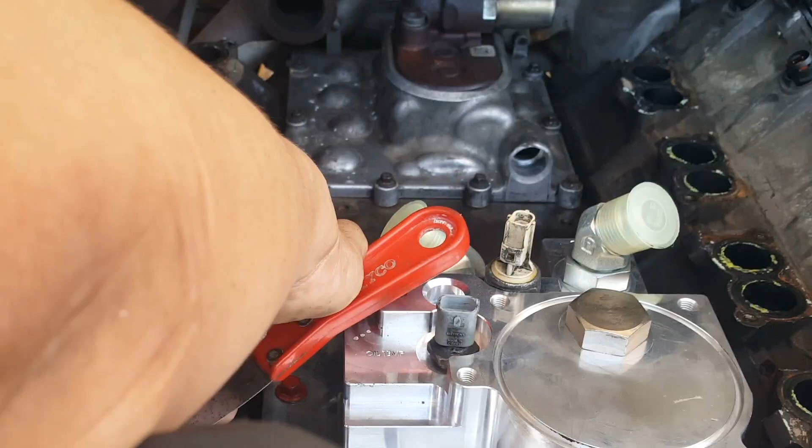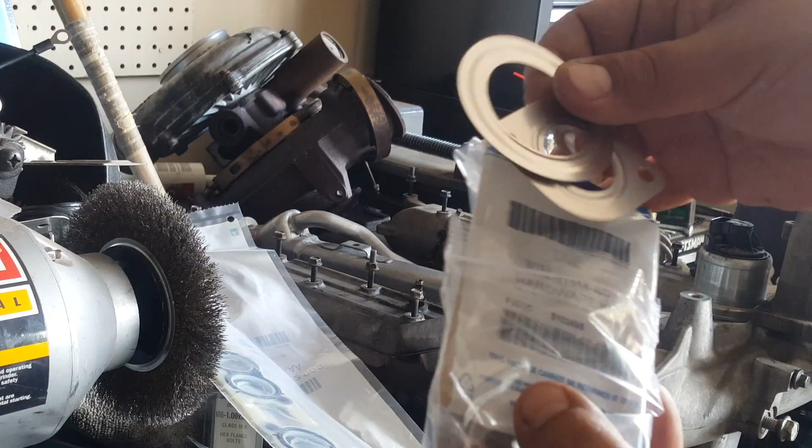Okay, now I'll work on the intake and install the EGR cooler to the intake. The kit comes with new gaskets. You could use the old ones, but if the kit comes with new ones, might as well use them. And a whole bunch of these little aluminum or tin gaskets for the EGR.

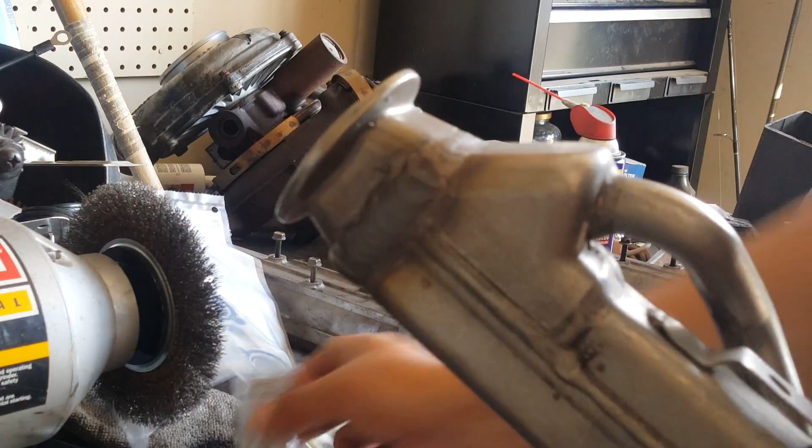My cooler was missing what I think is like a little nut down here that slips on. I'm actually using these M6 bolts instead. Got them at AutoZone, I think for under $3.

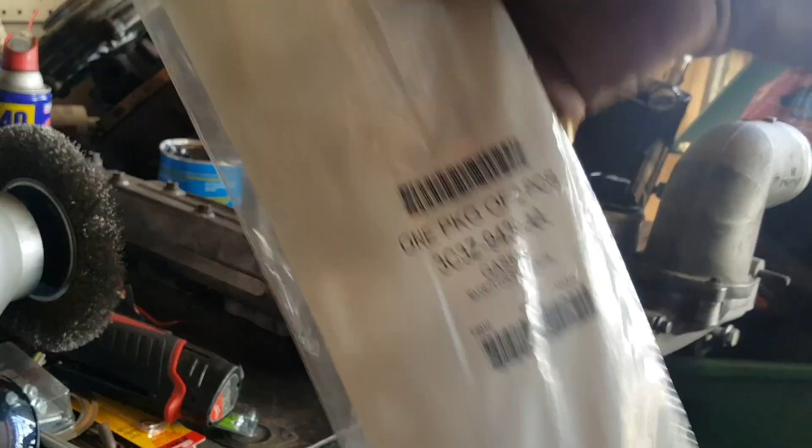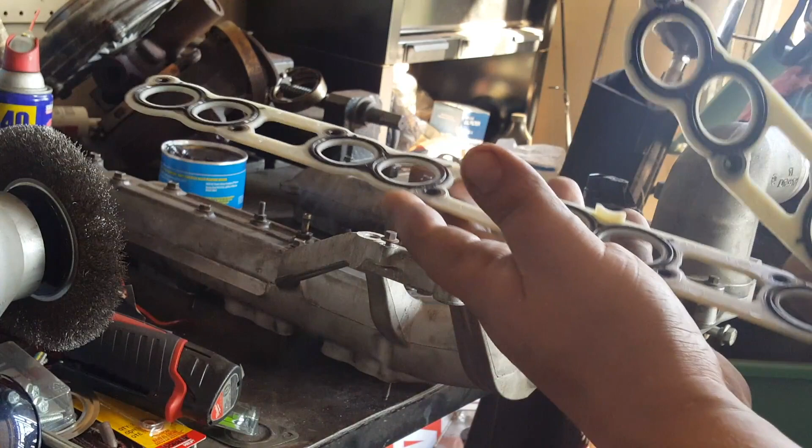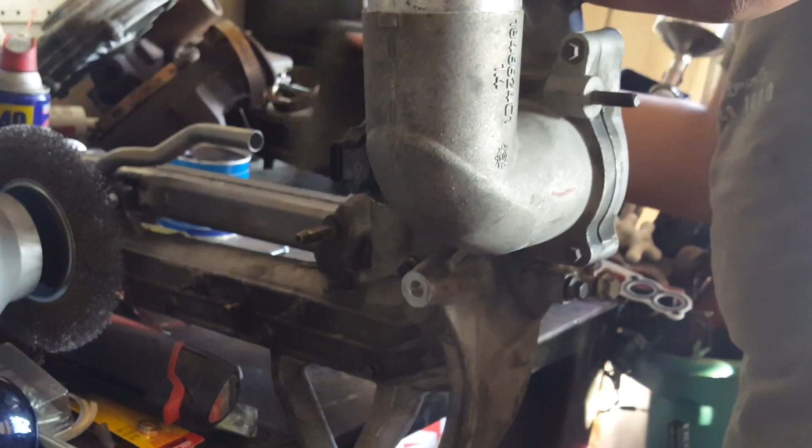Has these tabs on them. These go towards your intake, be it like this or like this, but it goes towards the intake, not towards the block. This tab goes towards the inside of the intake. Again, the tab goes towards the inside of the engine V.

Okay, we're ready for installation. Don't forget that the other side of the EGR cooler will also have this little metal tin gasket enclosed by your clamp.

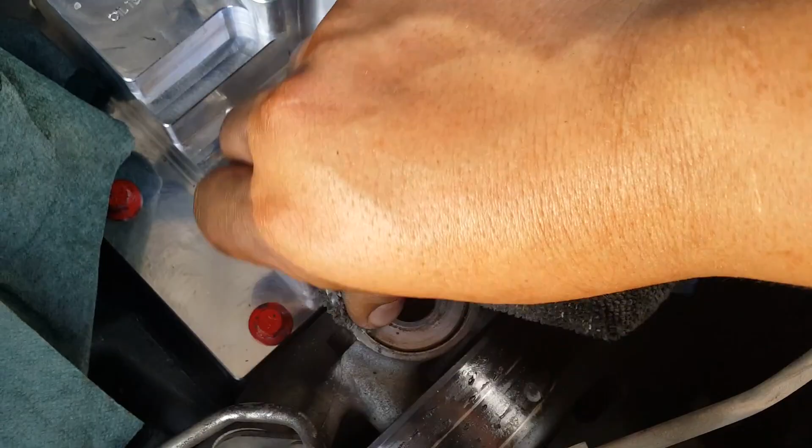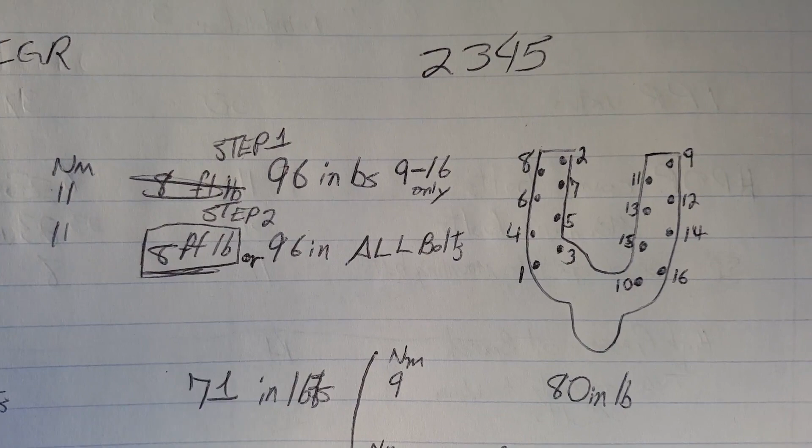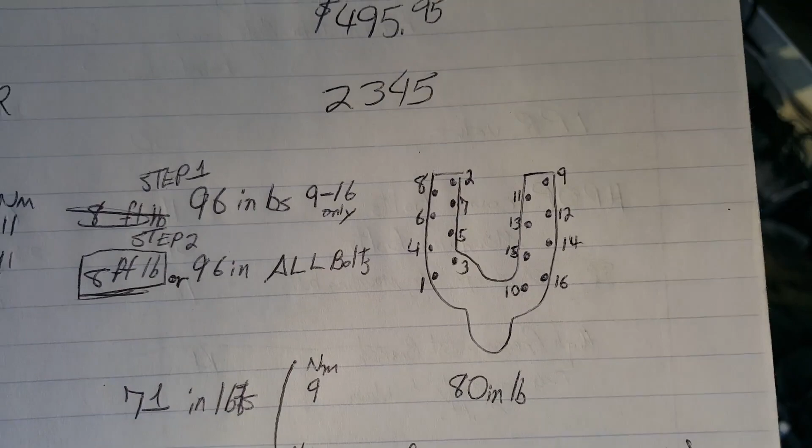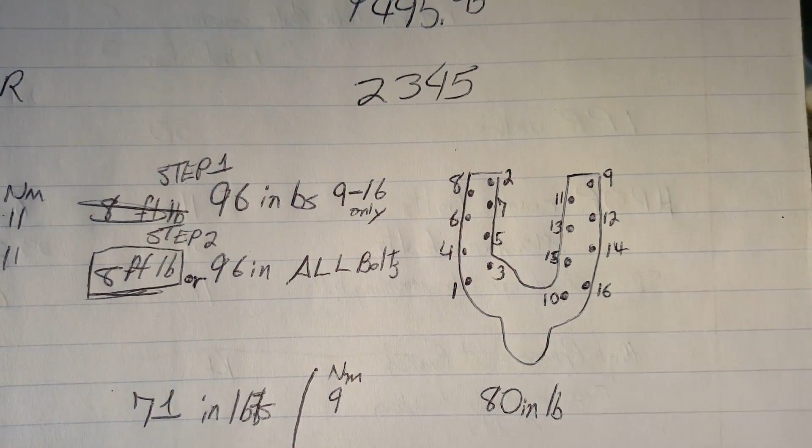This is what I'm going to use. This method is a combination of the manual, the tech manual online, and the Haynes manual. The numbering system refers to the bolts on the intake, and basically it's a two-step process. First you hand tighten all of them in the sequence that it's supposed to be. Then, like it says there, the first step is 96 inch-pounds, 9 to 16, which is basically the driver's side only. And then 96 inch-pounds, all bolts, 1 through 16.

Okay, some of the things I did while off camera, because it decided to overheat, was torque down all the intake bolts. Make sure you don't pinch this line right here, the one you have to bolt down. It goes down here, so just make sure it doesn't get pinched in the way. I lowered this back because, I don't know if you remember, we bent it to take the intake out. Let's proceed before this thing decides to overheat again.

Adding a little lube so you can slide in. Definitely, I think it would be easier if you actually install the EGR with the rubber hose provided.

Make sure you adjust the V-clamp while installing it. It seems to have gotten pinched between the high pressure oil pump housing and the EGR cooler, so I'll see how I can fix it.

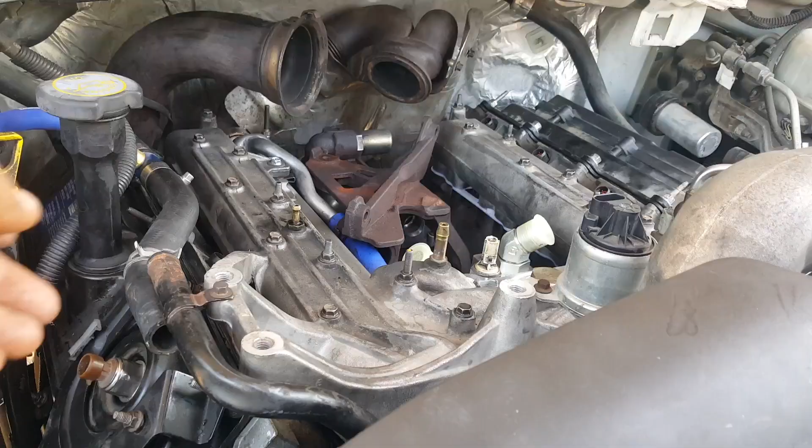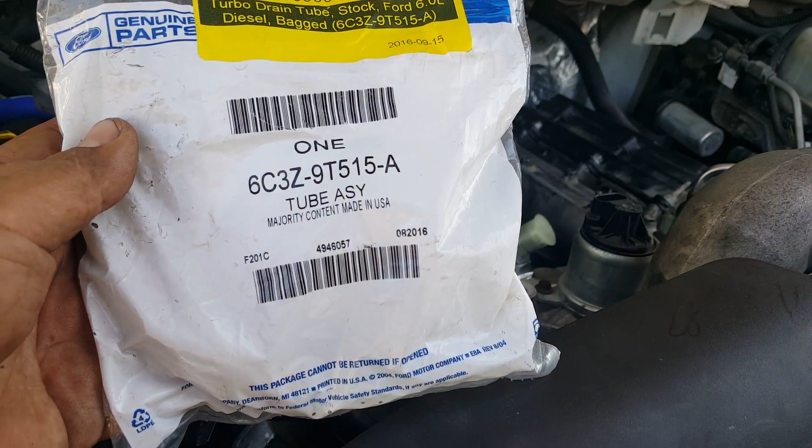I ordered a new drain back tube from the turbo. It comes with 2 O-rings. One's for there, the other one's for this side.

On the instructions, it says to measure from that little lip that you see right there, that lip to the edge. In my case, it is 23 millimeters, or about 7/8 or 15/16.

Anyways, I don't think it's necessary, but the instructions say so, so for some reason I have to do it. Reason being, if you go in and then you pull out, there's a chance that you might tear the O-rings. So anyways, there it is. I marked it, dabbed some oil on the ends. That one's easy. Alright, there it is. Now to bring back the turbo.

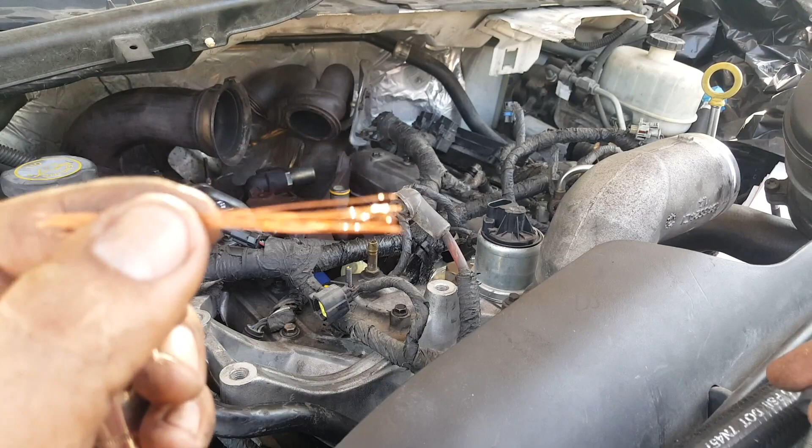If you remember, the last valve cover bolt on the driver's side had wasted threads, so I'm going to try putting some very fine strands of copper, just basic wiring, into the bolt hole. Hopefully the bolt will actually grab onto that, because it's very tight to tap and die a new Heli-Coil in there.

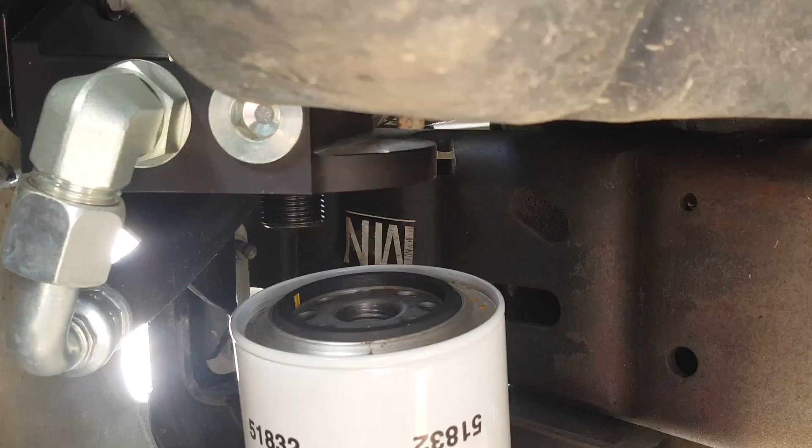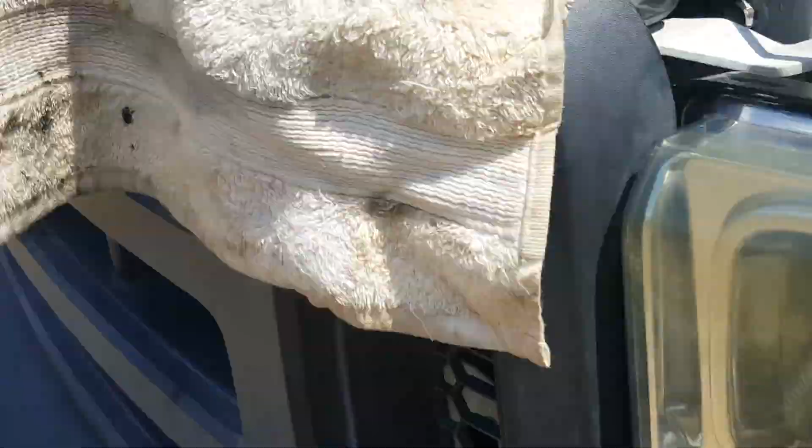Now for the important part, we need to prime this system before actually running anything. It's best if you have somebody to tell you when oil starts coming out of that side while you fill it up from, I think it's hose 3, which is the one on the passenger side.

Notice how the path is right there through where the AC lines go in, under the battery tray, under the AC lines again, up and over, and that'll give you the correct position to that outlet—I believe, no, inlet.

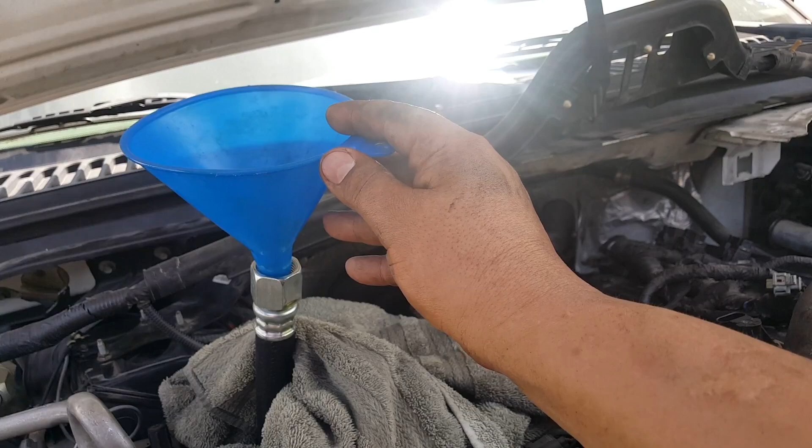Okay, once you got that, fill up the filter, screw it back on.

So the priming of the oil cooler, the radiator part or the cooler plus the filter, it's about a good three quarts of oil.

I don't know how much it would have been if I hadn't dropped so much at the beginning. Maybe get a smaller container, like a quart, and start pouring that, because the gallon is too much to pour a little at a time.

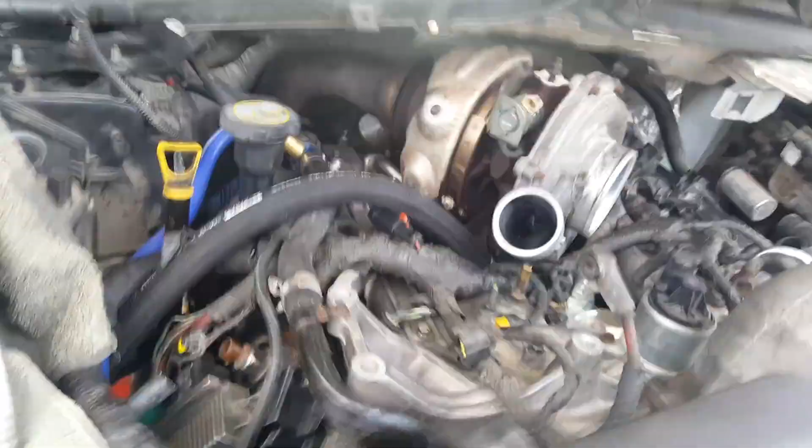Make sure the drain back aligns so it can snap on.

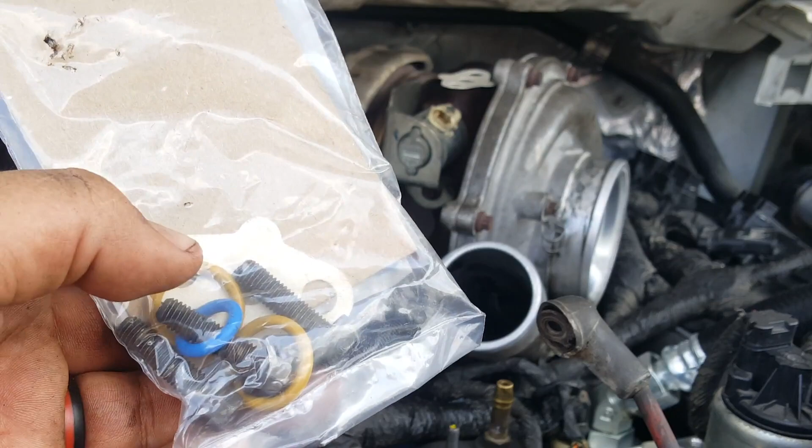The kit comes with, I believe, 3 bolts for your turbo, the gasket, the 2 seals that go on the drain back on the turbo drain, and another screw that goes to mounting the turbo oil line.

So let's replace this one.

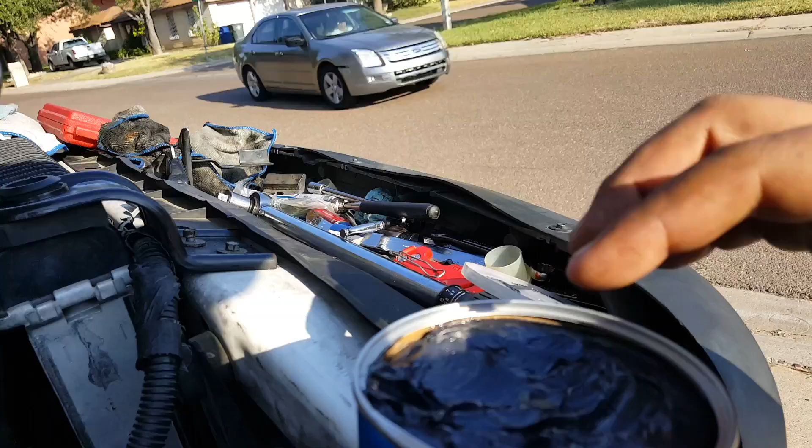I already screwed up one of these, so I'm going to use grease this time. I used engine oil on the other one and that didn't work, I guess. I kind of pinched it because it wasn't going in straight—it was going at an angle and kind of pinched it and ruined it. It cost me $5.

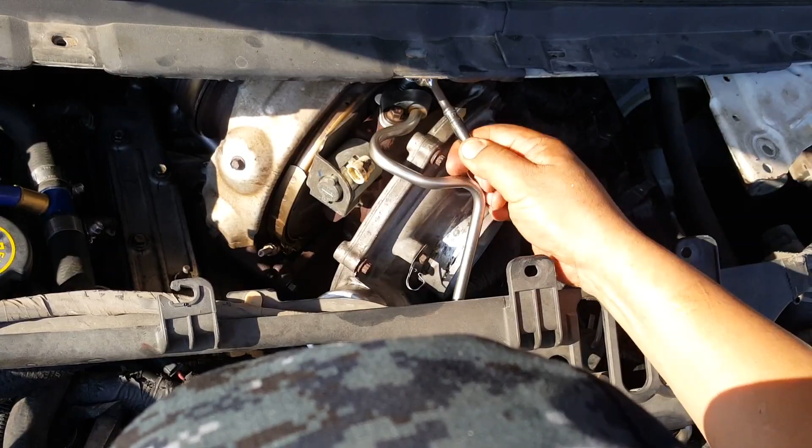Important lesson: don't use that bolt to screw down the turbo oil pipe. Otherwise the oil supply gasket might pinch, which it did in my case, and it'll break.

Your oil filter housing has a gasket that is supposed to be reused in this oil cooler. I didn't know that at the beginning, so I actually cut it just to make sure I wouldn't confuse it, but the kit does not include it, so I had to buy one. It's approximately $8.

I don't know if it really needs it since it's just for decorative purposes, but I don't want it wobbling around, so I guess that's why I'm going to install it.

Make sure to push it in all the way so it doesn't slip out.

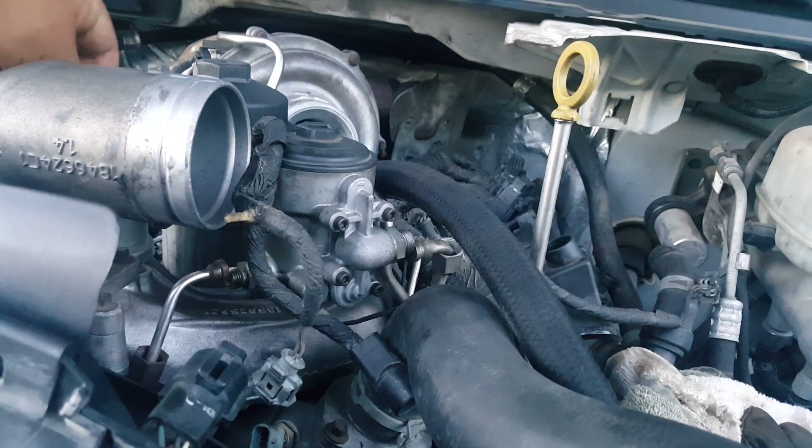Snap that into place. This goes back there. It's gonna go there, it's gonna go there.

This is the one they call the Banjo Bolt, and I believe the copper washers need to be replaced whenever you mess with it.

The banjo bolt goes on here. It has a copper washer on each side of that part right there. It says it has to be replaced every time you mess with it. These are the parts, they come now with a little rubber gasket around them.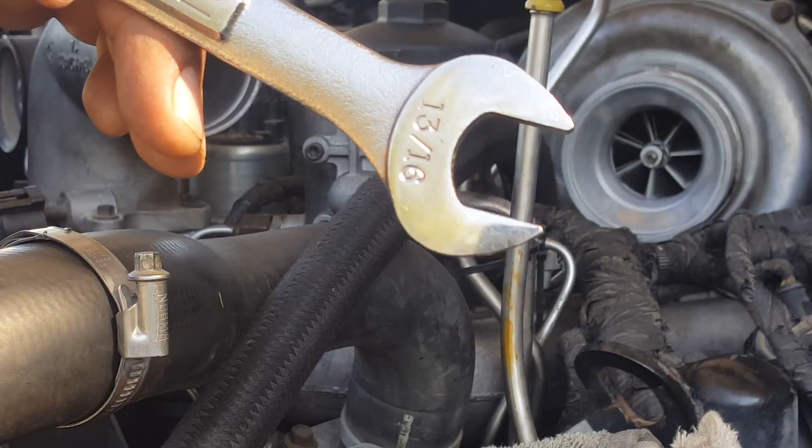It's 11/16, also for the one in back. 13/16. And a 3/4 for the banjo bolt.

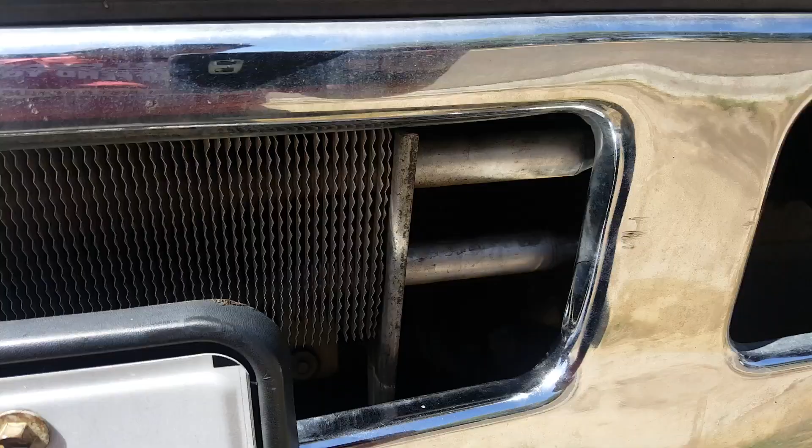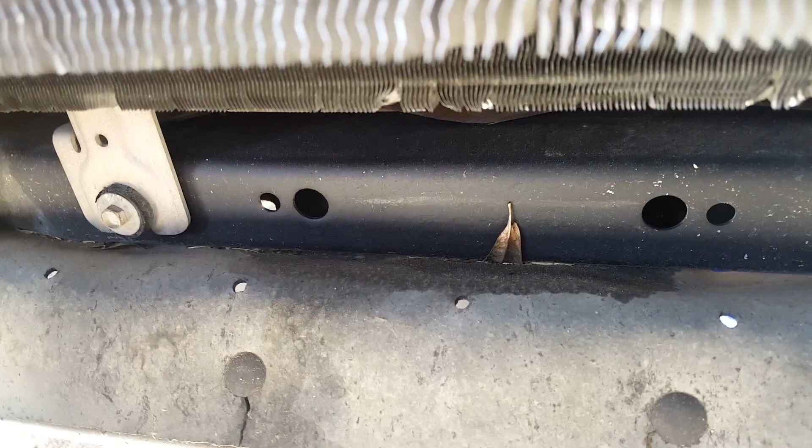To relocate the power steering cooler, I am going to probably fabricate some sort of bracket with flat bar that'll somehow screw into maybe the existing holes. Find a way where I can actually stick it out to where it can bolt on to the existing brackets of the cooler. Probably some flat bar, somehow, maybe even just weld it to the frame, but make it go out flat so I can bolt it down in case I need to service it. Just don't plan to. We'll see how that goes.

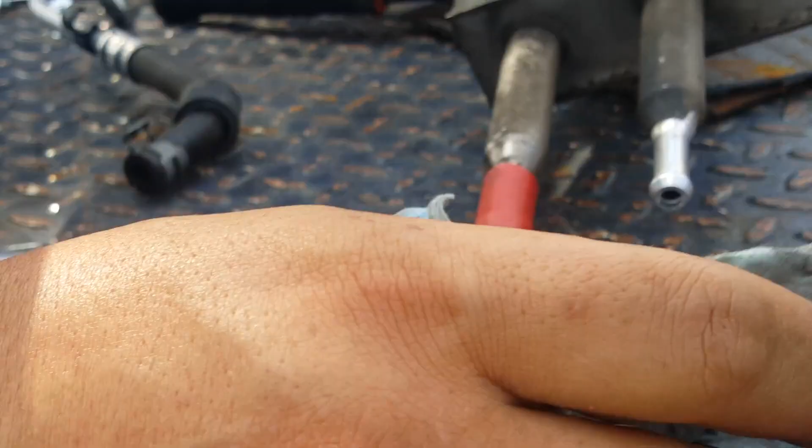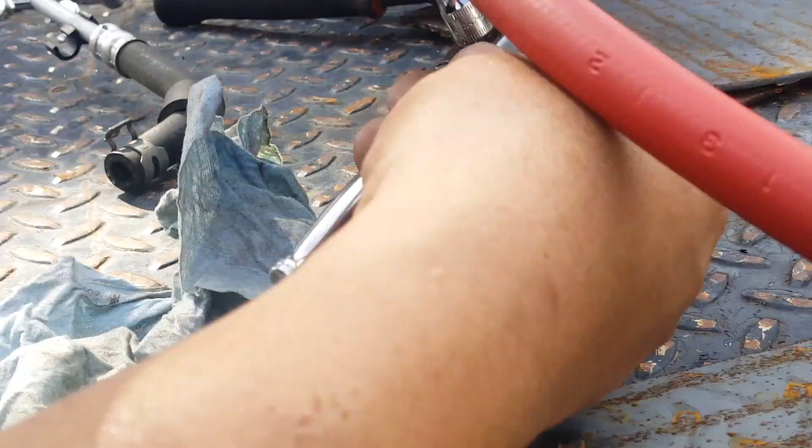With a new bracket installed, hopefully the cooler will fit right here in this hollowed out space. If you want to take off the bumper to make this easier, I guess you can. I was able to install the bracket and the cooler through this little hole right here in between the bumper. Came out all right, I just had to bend it a little bit to keep it off of the AC condenser. But other than that, it looks like it's gonna work great.

Right now I just have to hook up this hose and it should be good to go. Just like that, there are the two lines, the homemade bracket. And it should look good. This is kind of important because if it's anything like my 7.3, the brakes depend on your power steering, the Hydro-Boost.

Now that our lines are connected down there, I can take the liberty of cutting the lines up here, since I just looped them to make it easier to install. This one has a natural curve this way, so it's going to go to the bottom. It is plastic, so you want to be gentle with it. You don't want to break it off.

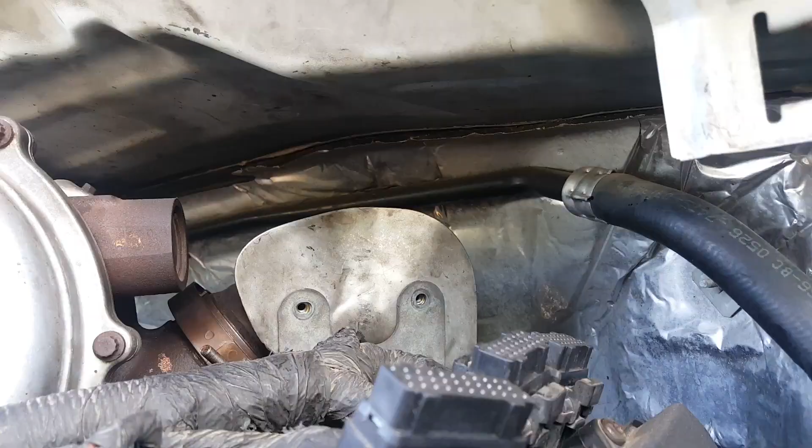Make sure the ground is already grounded to that nut right there. Let's get ready to install the FICM. The FICM bracket that doesn't have a little stud goes in the back. The bracket that has this little stud right here goes to the front.

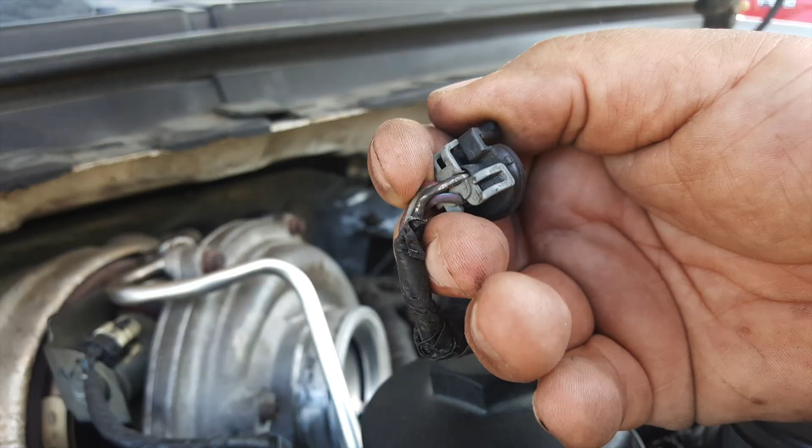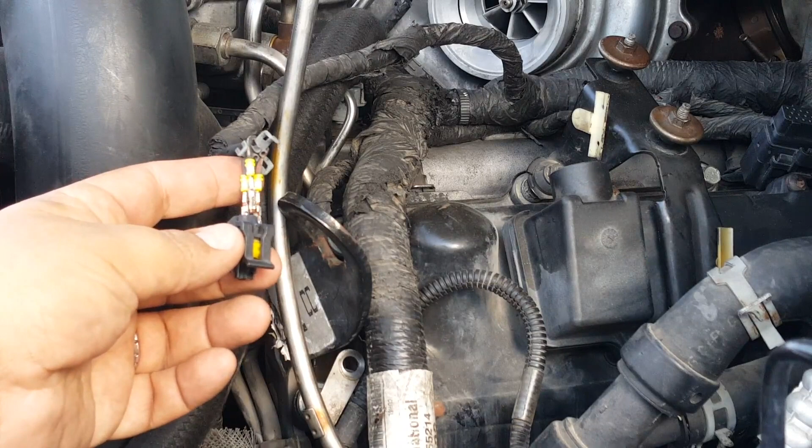This connector had to be replaced because I believe this is the one that's causing all the surging. It has these 3 clips that are clipped onto the back right here in this area. So you break that off, and you lift these little tabs that each outlet has. Pretty much break them off because you're going to replace them anyways, and you can push each wire out.

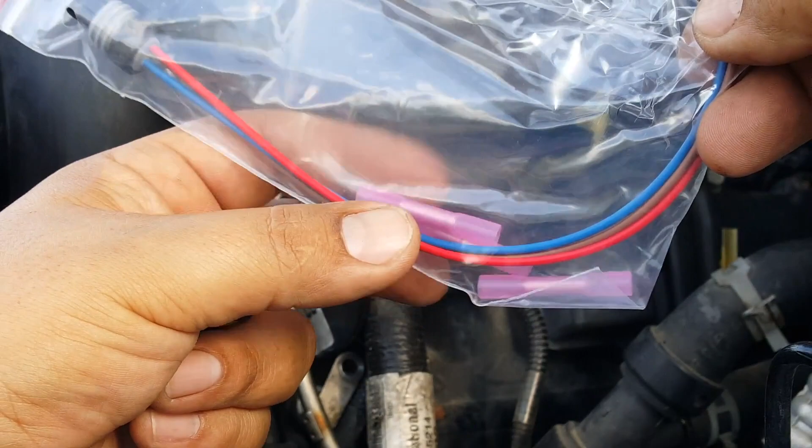It'll pop out and it'll look like this. The reason I'm doing that is because I need every bit of wire available. I don't want to cut into this. I will probably splice it right through there. Eventually I might solder the thing together with the new one. It does come with these waterproof, I guess, butt joints. So we'll see.

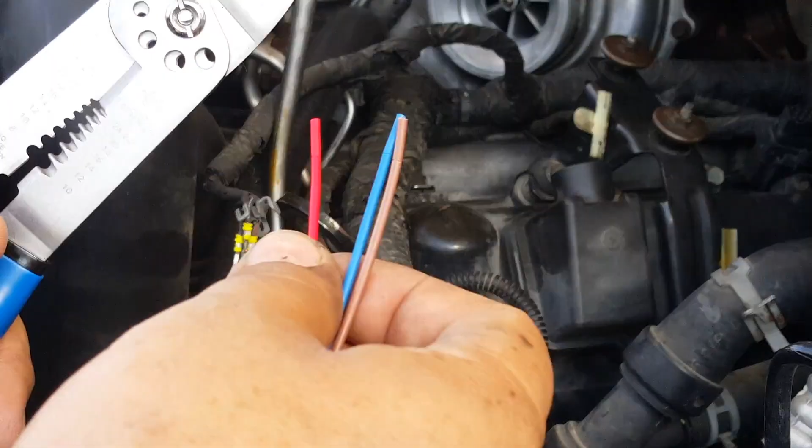Try to keep the order right. I want to make sure you keep the same order. Bottom by itself goes with the blue.

So I don't really trust these things, I'd rather just solder them together. I might do that if the thing doesn't clamp down right.

Right, which is like a red line, goes with the red. Actually, they are color coordinated. This one has a blue line, goes with the blue. This one has a red line on it, goes with the red. And this one has a white line, which goes with the brown.

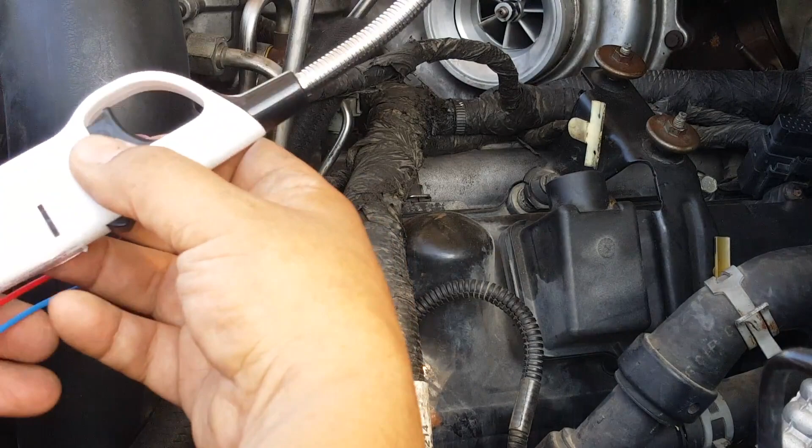Usually a torch is better for this, it's just I don't have access to mine right now. See, they're sealed up. There you go.